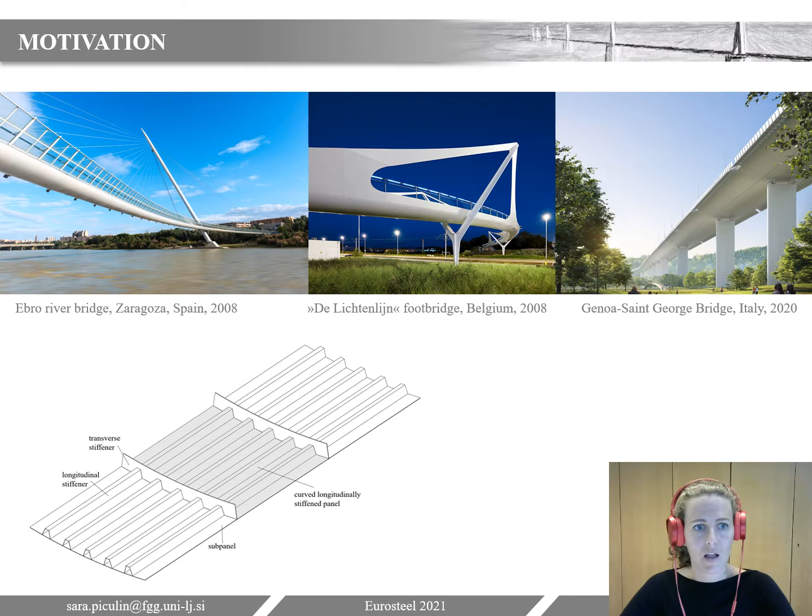It has become widespread in the last 2 decades to employ curved panels in the construction of steel bridges. In this presentation, I will focus specifically on longitudinally stiffened, transversally curved plates representing the bottom flange of a box girder.

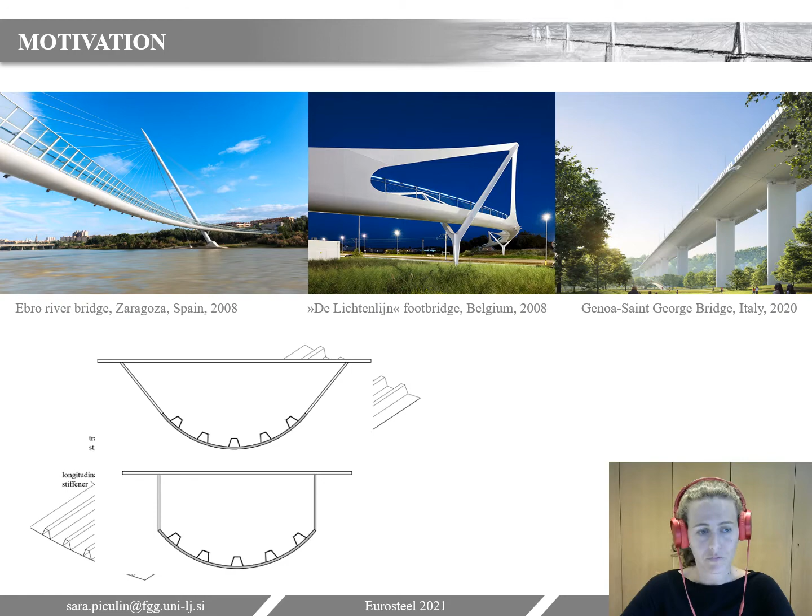In this case, the curved bottom flange is longitudinally welded to vertical or inclined web plates to form a closed box section. One of the most recent bridges incorporating a curved bottom flange is the new Genova bridge in Italy, which replaced the old Morandi bridge that collapsed in August 2018.

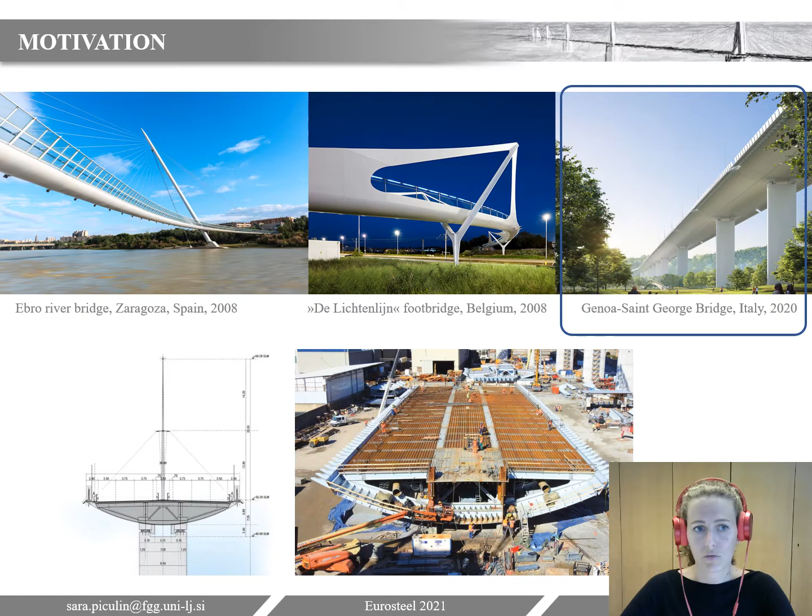The design of curved plates is not the subject of structural Eurocodes. Actually, Eurocode 3-1-5 is limited to flat-plated structures, and Eurocode 3-1-6 refers to shells of revolution.

Several studies showed that the elastic buckling stress and the resistance of curved plates are both strongly affected by curvature. Some authors already proposed approximate methods to evaluate the ultimate resistance of unstiffened curved panels.

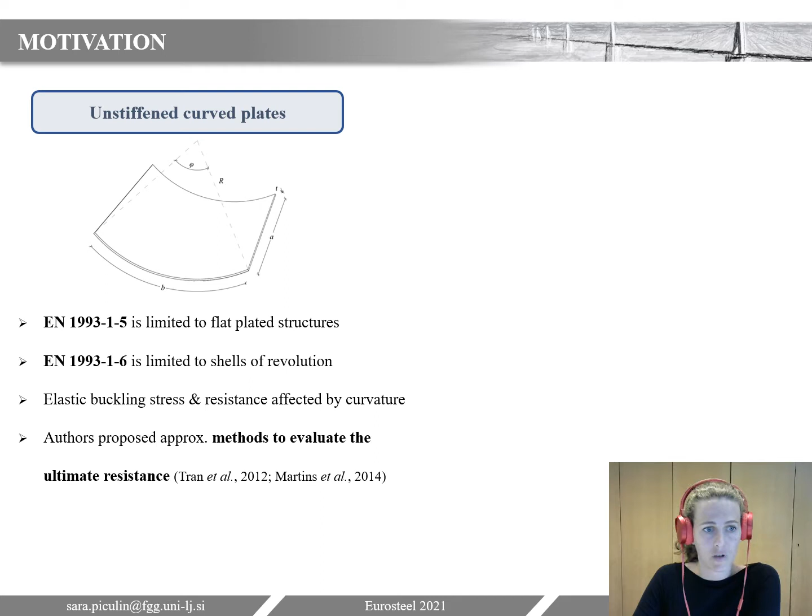When it comes to stiffened curved plates, there is again a lack of practical design rules, and the research is very limited. Most of the available research actually comes from the marine construction field, where the geometry, materials, and imperfections are not directly applicable to bridge design cases.

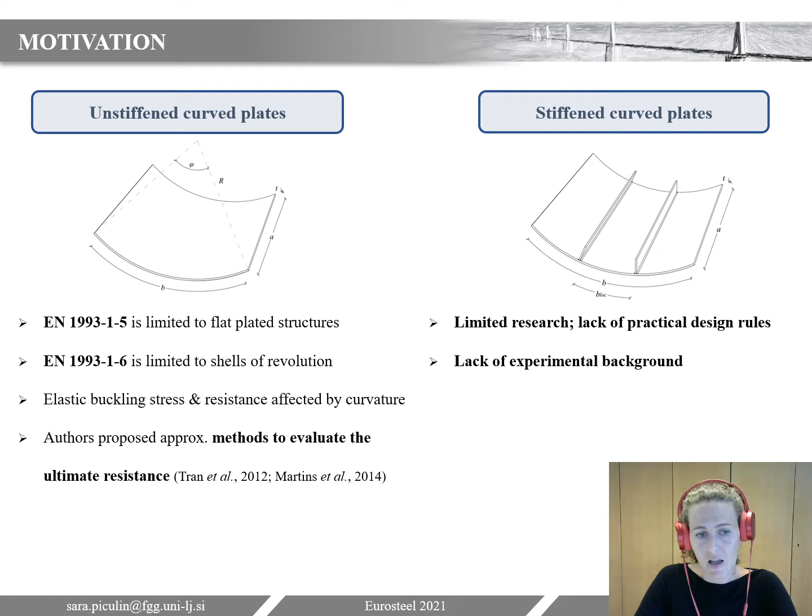On top of all, none of the mentioned numerical analyses has any experimental background. This is why we decided to perform experimental and numerical evaluation of stiffened curved plates and to propose new design rules. Most of the work was done in the framework of the RFCS research project Outburst.

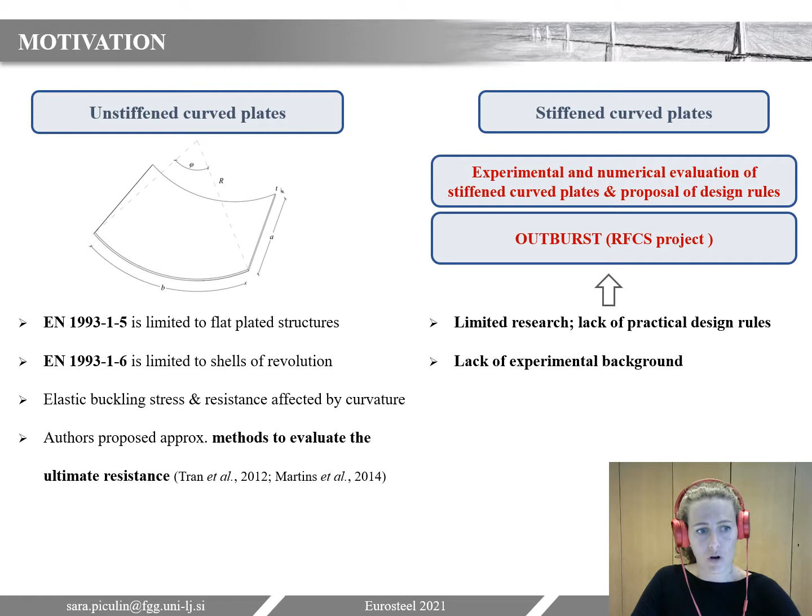Experimental tests on 9 isolated stiffened steel plates subjected to uniaxial compression were performed in the Laboratory of Structural and Traffic Engineering at University of Ljubljana.

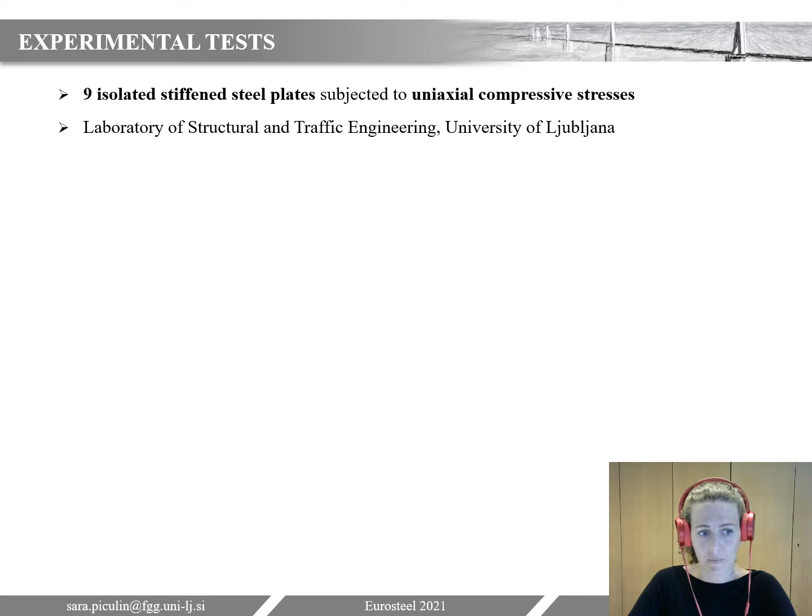The height of the specimens was approximately 1.8 meters and the width was 0.6 meters. The experimental setup was designed to achieve uniform compression in the panel and to avoid any eccentricity in the load application.

The hydraulic piston was installed in the main test frame along with the vertically positioned test specimen, and the load was distributed uniformly on both the panel and the longitudinal stiffeners.

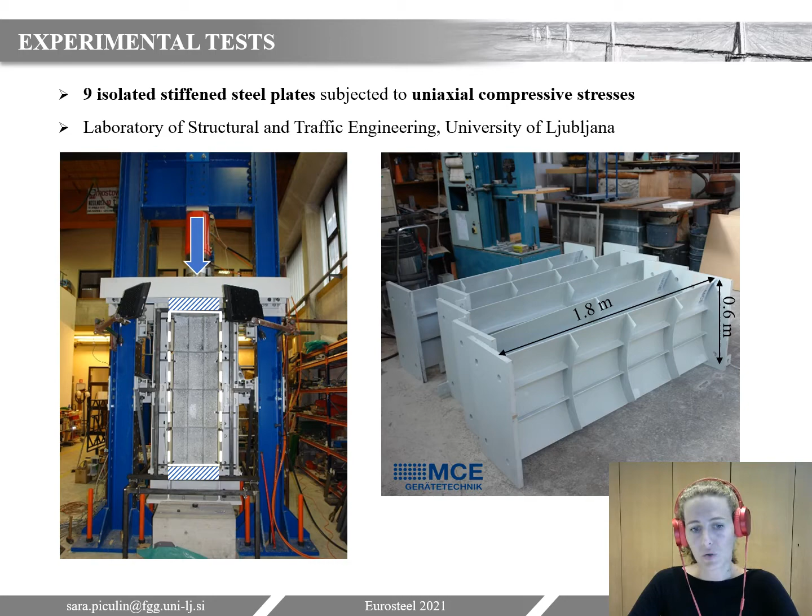The curved edges of the specimen were fixed and the longitudinal vertical edges were simply supported. The tests were displacement controlled up to collapse.

Specimens with different parameters were included in the tests to study their effects on the ultimate resistance. 7 curved and 2 flat panels were tested.

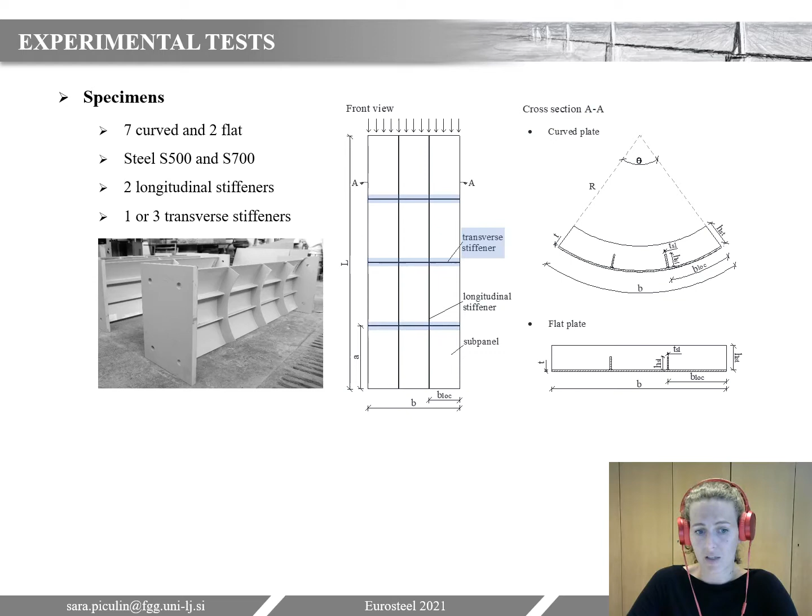They were made of different high-strength steel grades, and all of them were stiffened with 2 longitudinal stiffeners, but some of them with 1 and some with 3 transverse stiffeners, and this resulted in 2 different aspect ratios of panels.

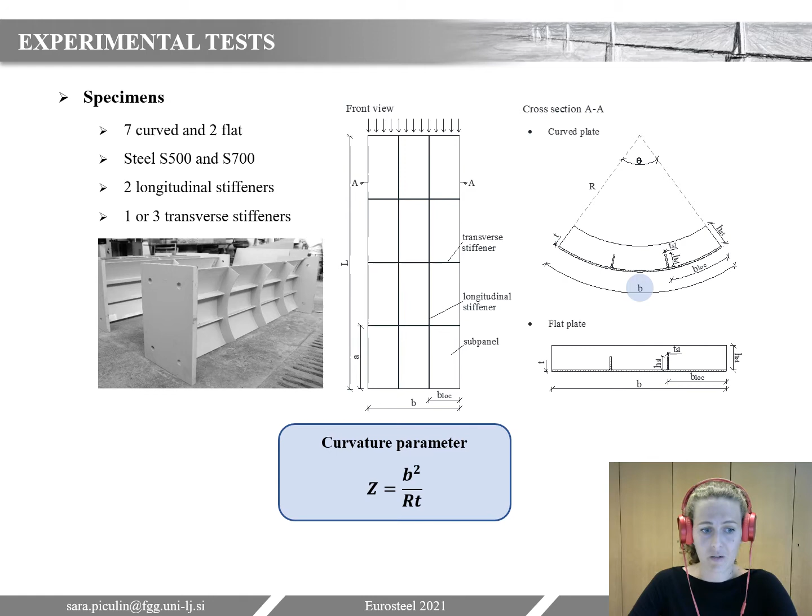The curvature of the panels is described with the curvature parameter Z, that is calculated as the square of the width of the panel divided by the radius of curvature and thickness of the panel.

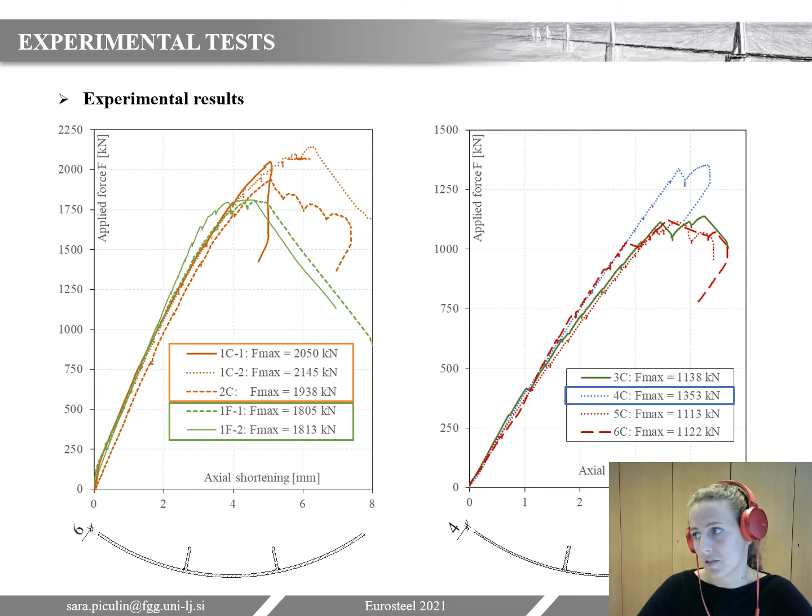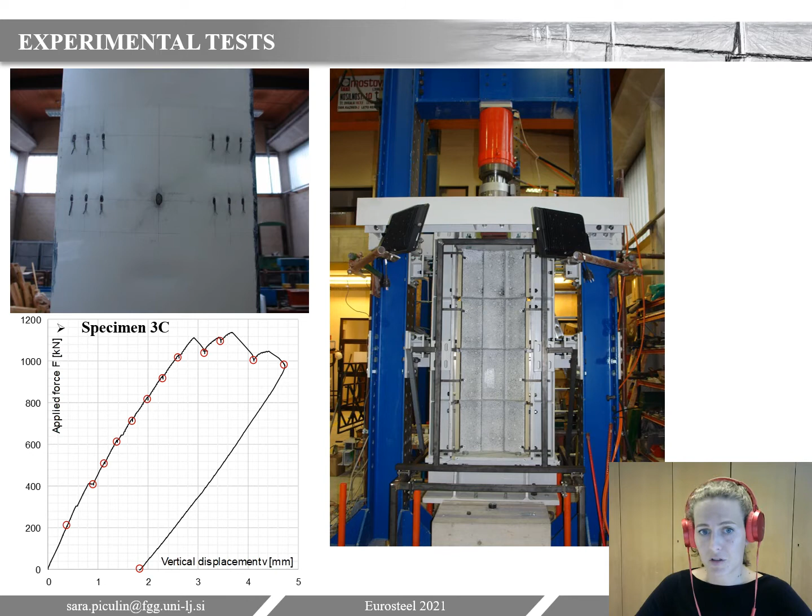In this animation, you can observe the development of the out-of-plane displacements at different loading stages. The figure on top represents the deformed panel after unloading. Here you can see the first buckle, then the second and the third one.

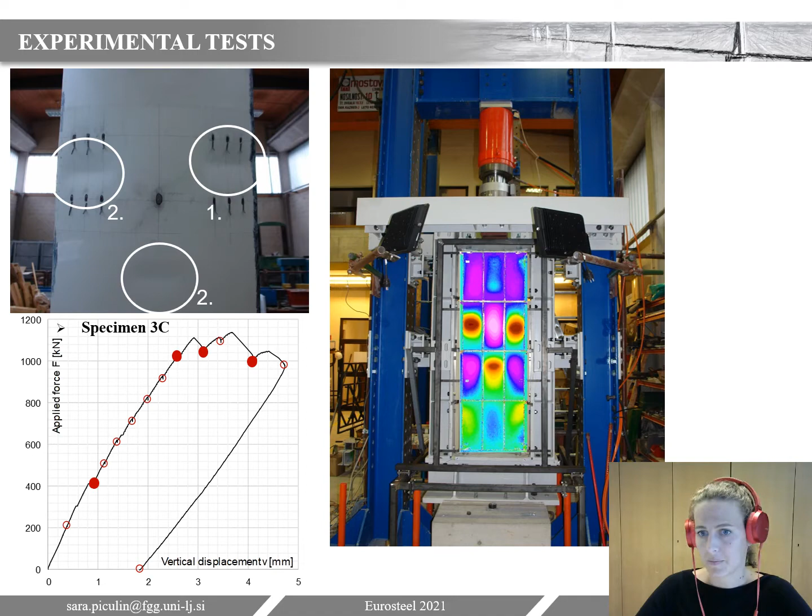In order to assess the general behavior of stiffened curved plates under pure compression, a simple numerical model was created where the geometry was restricted to longitudinally stiffened panels between transverse stiffeners.

A panel stiffened with 5 regularly spaced trapezoidal longitudinal stiffeners is considered. The external load is introduced by a uniform compressive shell edge load in the longitudinal direction, and it acts both on the main plate and the stiffeners.

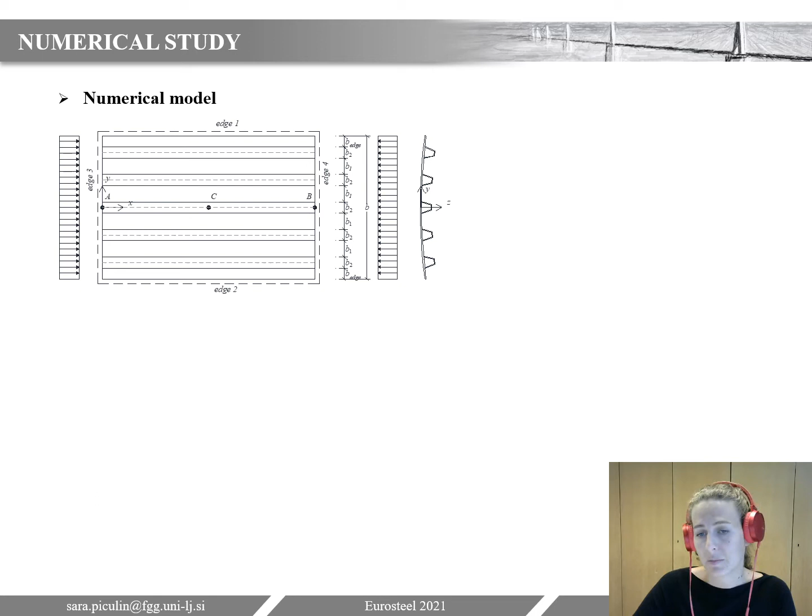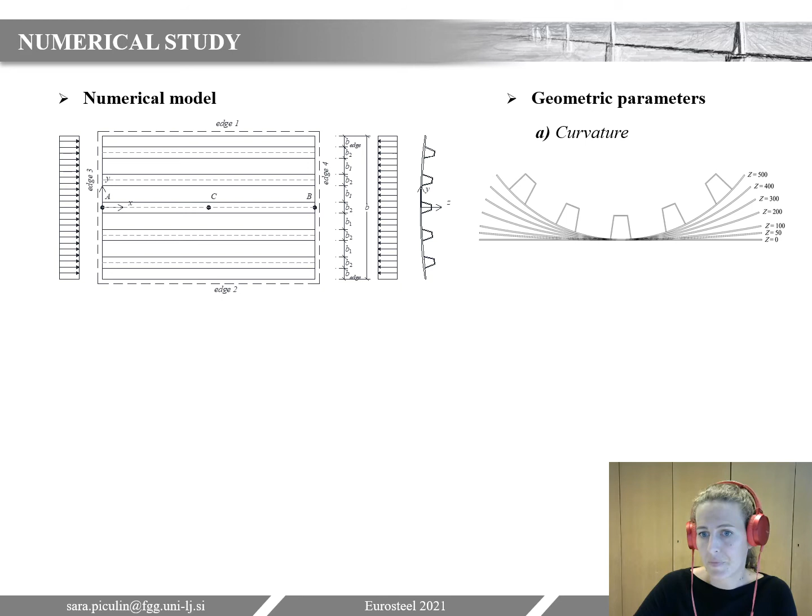The study includes a variety of geometric parameters, such as different curvatures, going from 0 to 500, 3 different sizes of stiffeners, 4 different panel thicknesses, and 7 different aspect ratios of the panel.

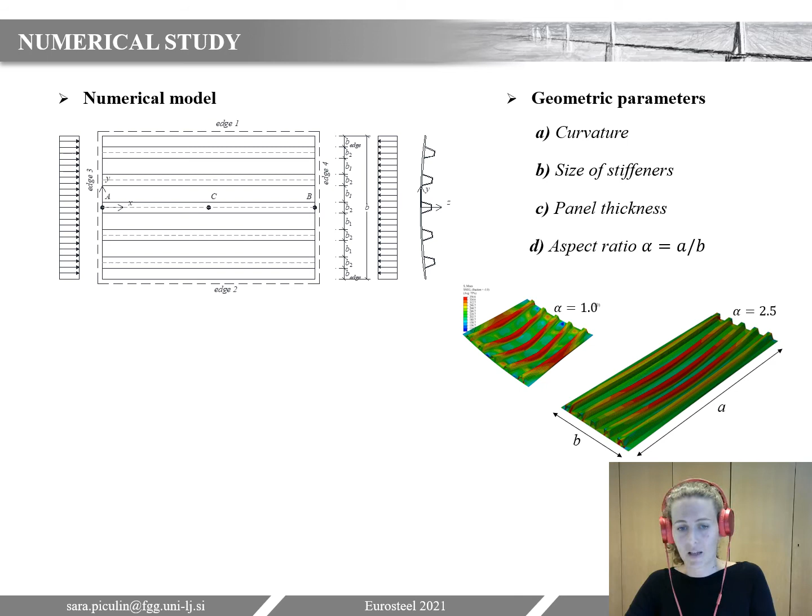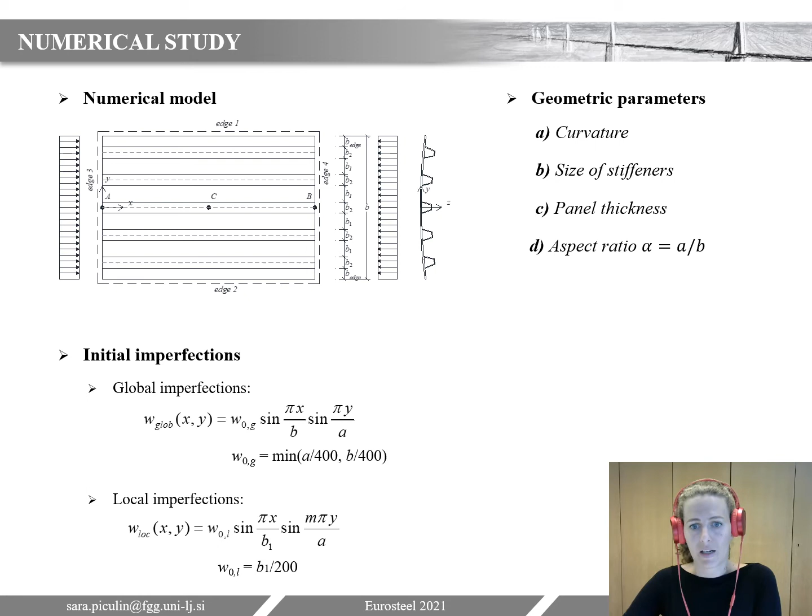The initial imperfections were applied as equivalent geometric imperfections with the shape of sinusoidal functions. Global and local imperfections are applied in the model, and 7 different combinations of initial imperfections are considered for each set of parameters, as shown in this figure. For each set of parameters, we performed 7 analyses, and the characteristic resistance of the plate is finally defined as the most unfavorable of the 7 resistances.

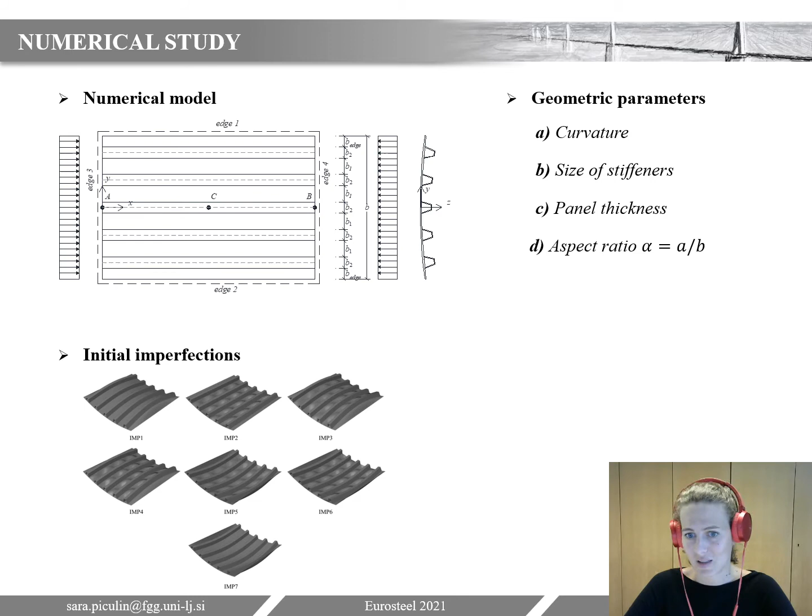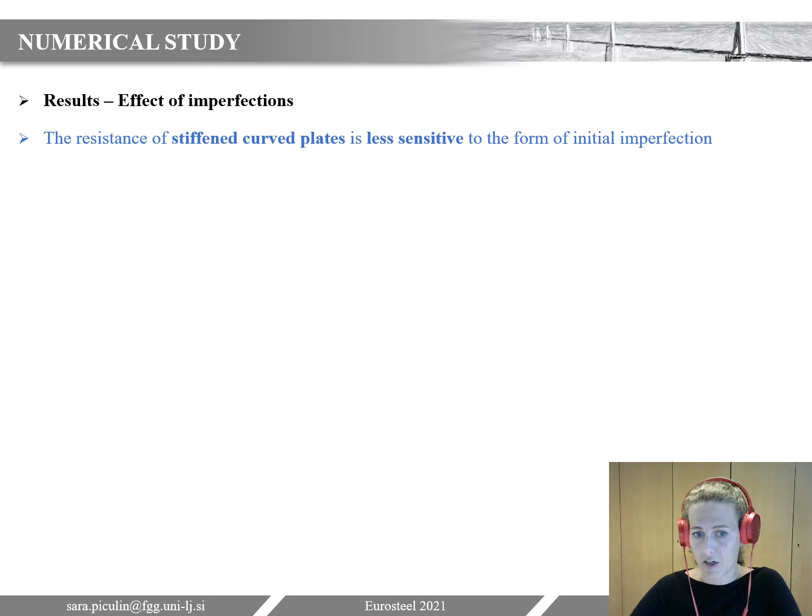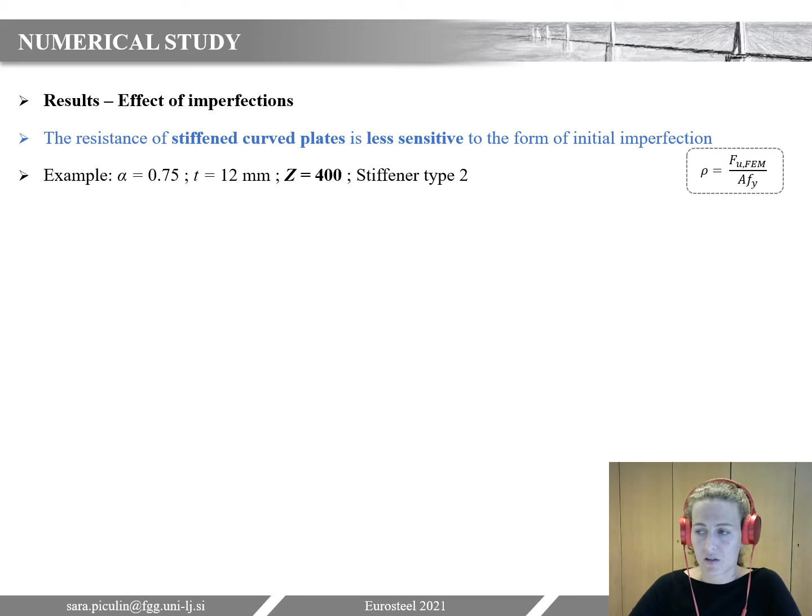The results of the numerical study show that the resistance of stiffened curved plates is less sensitive to the form of initial imperfections compared to flat panels. An example is given for a plate with curvature Z 400, where the difference between the resistance for the most favorable and the least favorable imperfection shape is only 2.5%.

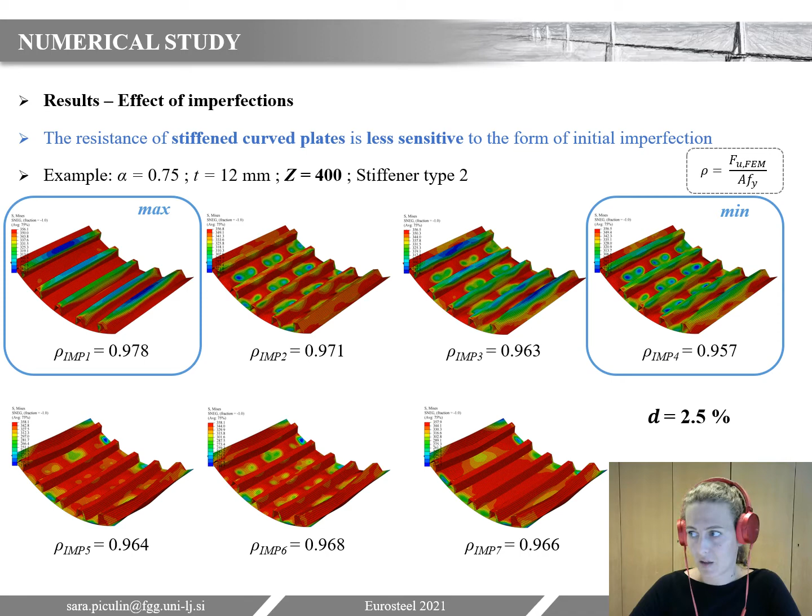While for a flat plate with the same dimensions, the difference is 19%.

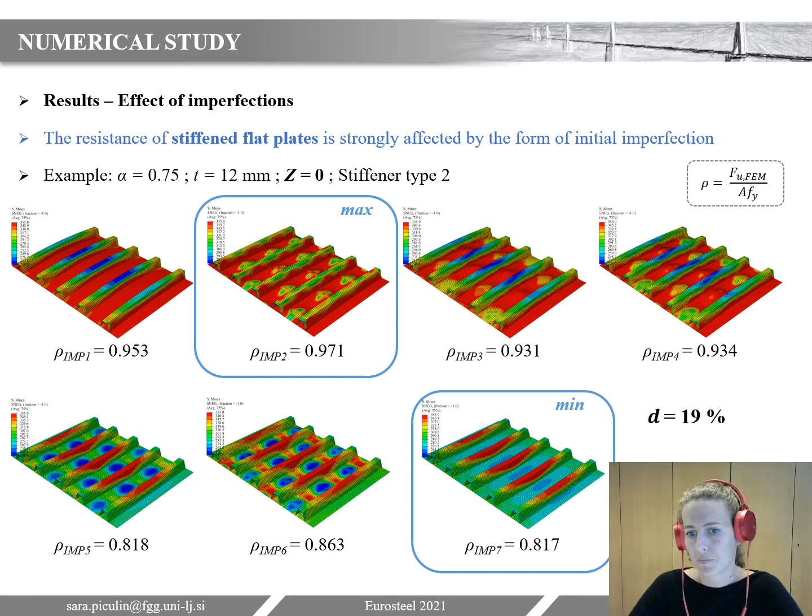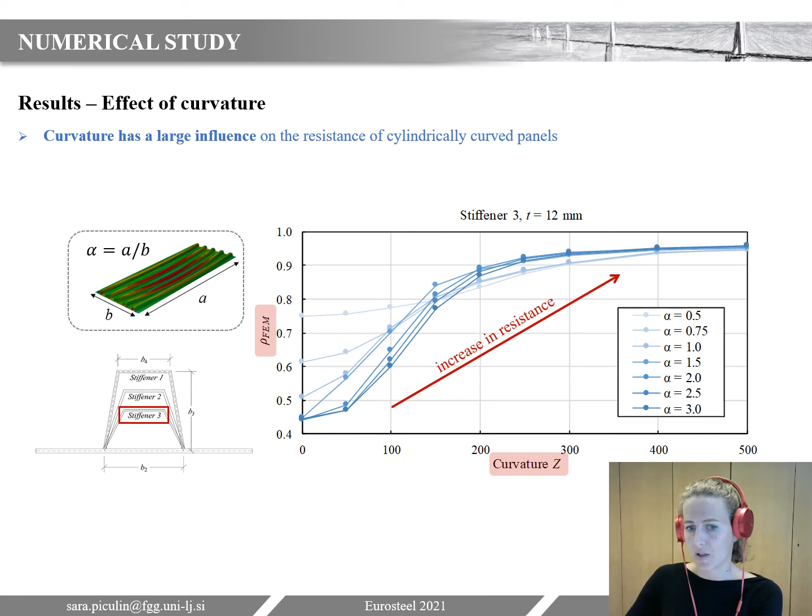The results show that curvature has a large influence on the resistance of curved panels. Actually, the resistance is in general always increasing as the curvature increases. This diagram gives an example for long, highly curved panels with flexible stiffeners, where the resistance is twice as high as for flat plates with the same dimensions.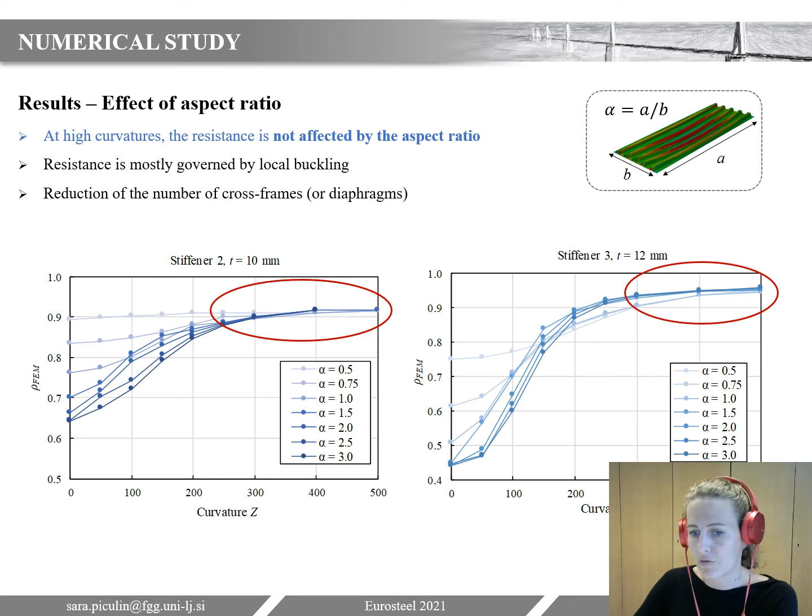Reducing cross frames means a reduction of material consumption and welding, and in a bridge structure this leads us to 2 very important benefits. These are the reduction of fabrication costs and environmental impact.

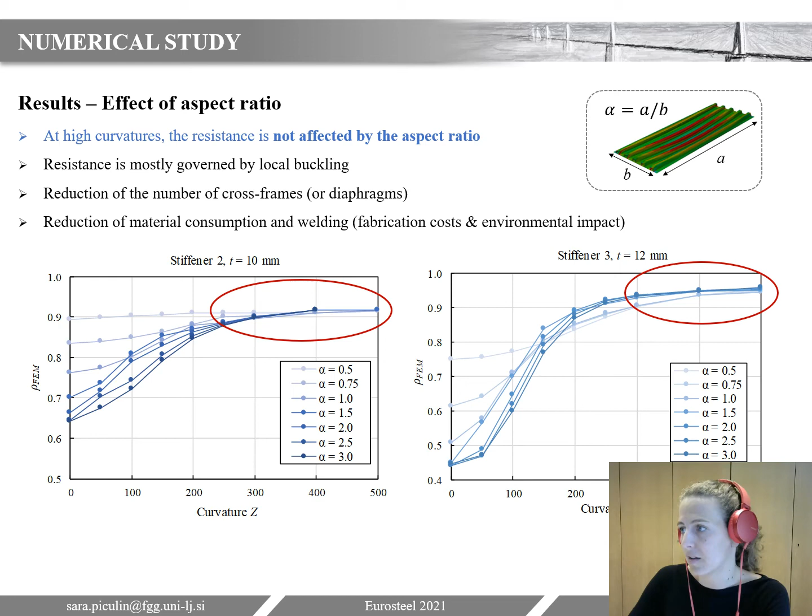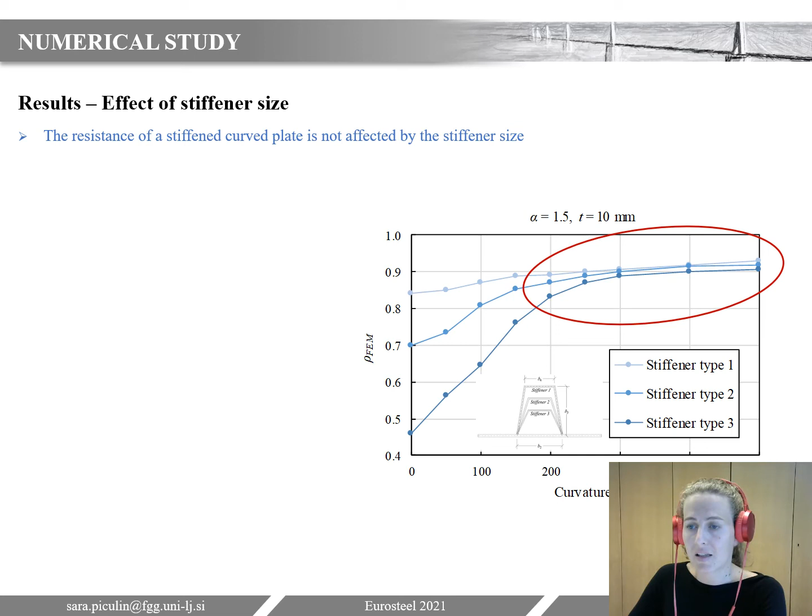Here we are comparing stiffeners for different sizes. As you can see, the resistance of a stiffened curved plate is not affected by the stiffener size at high curvatures. This is because at high curvatures, the size of the longitudinal stiffener does not add much to the cross-sectional moment of inertia, since the plate itself has a much higher inertia compared to the flat plate.

Smaller stiffeners affect the overall structural weight and material consumption, but more importantly, they simplify the assembly of transverse stiffeners or cross girders with the panel.

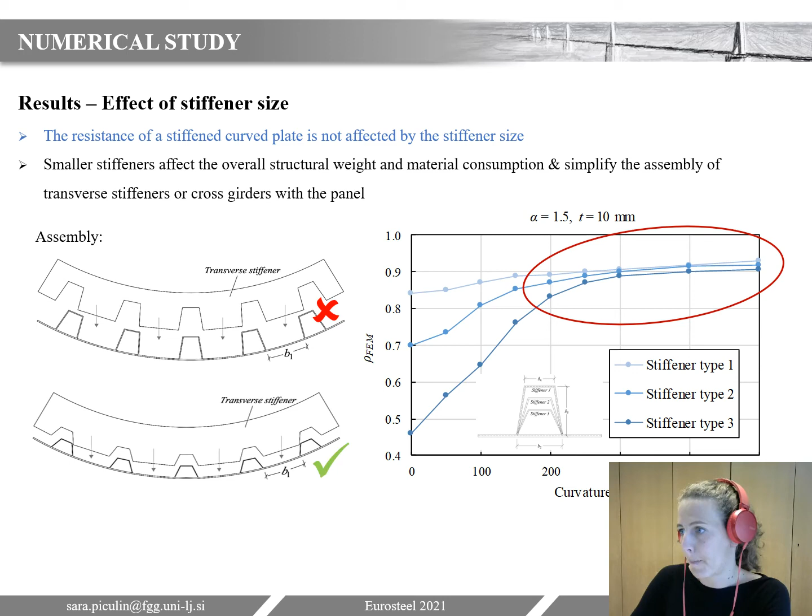Comparison of the numerical results with the design guidelines for flat-plated structures from Eurocode 3-1-5 show that the use of Eurocode neglects the positive effects of curvature and leads to extremely conservative results.

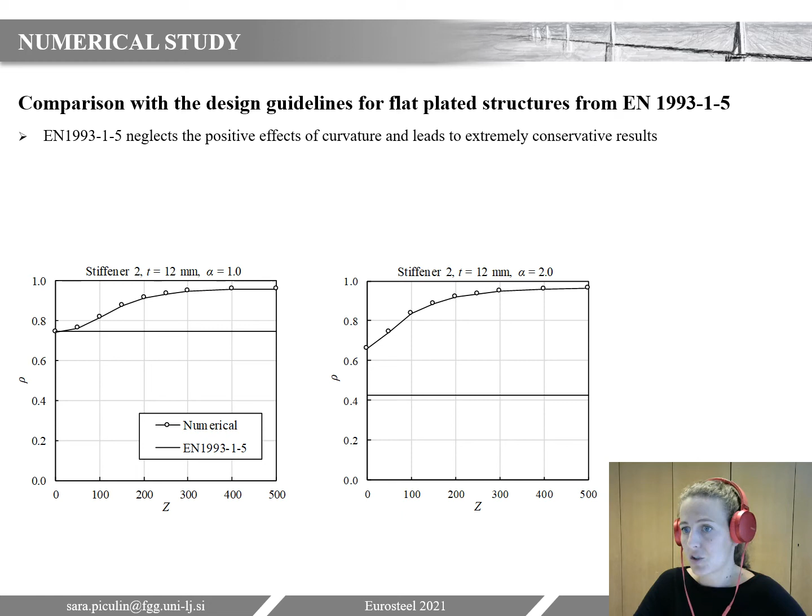This is why we developed new design rules for stiffened curved panels. The presented method is intended for practical use and is in accordance with the design rules for flat plates, but it takes into account the positive effects of curvature.

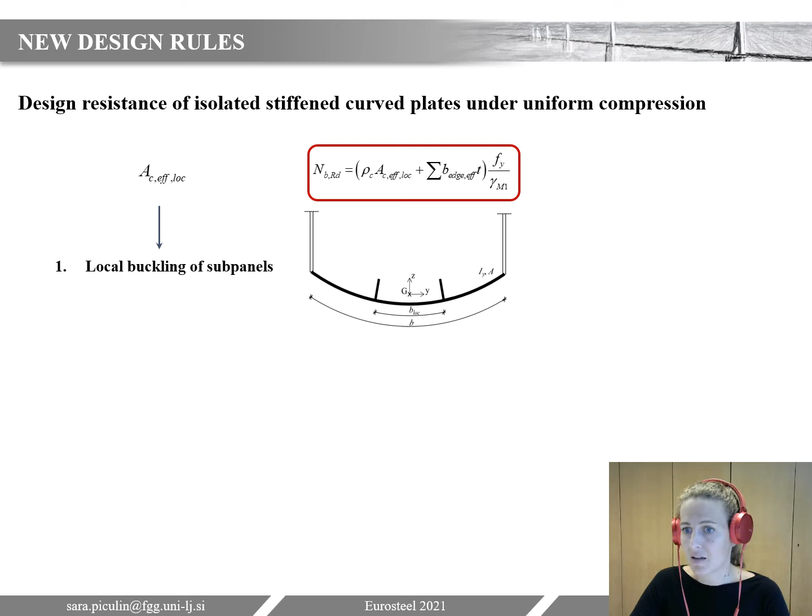So, similar to flat plates, the resistance is determined by the interaction of local buckling of subpanels and global buckling of the entire stiffened plate. First, we calculate the local and global curvature parameters, and then the effective areas are calculated for stiffeners according to Eurocode 3-1-5, because they are composed of flat panels.

And for the main panel, if local curvature of subpanels equals 1 or less, we follow Eurocode 3-1-5. Otherwise, the rules proposed by Martins should be used. The two articles with the rules are referenced at the end of the presentation.

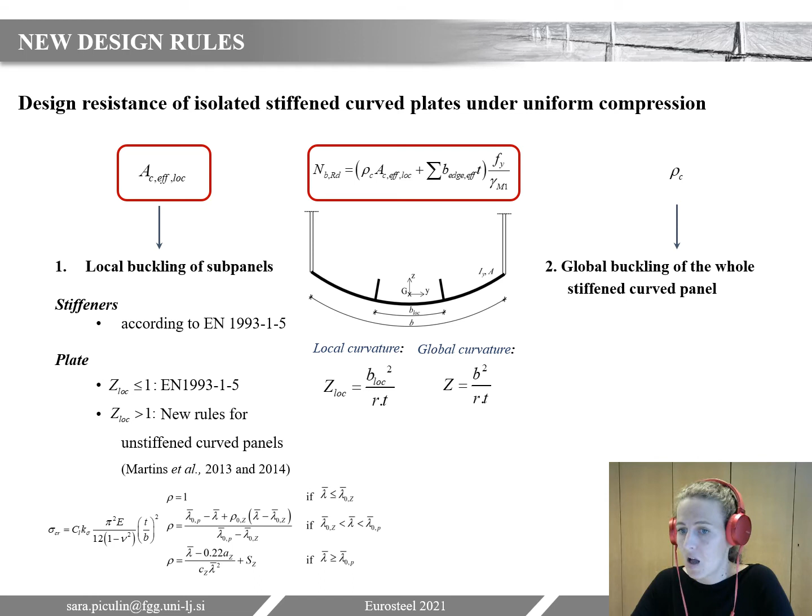For the global buckling reduction coefficient, we calculate the shell-like buckling and then the column-like buckling coefficient, and finally interpolate them according to Eurocode 3-1-5. The shell-like and the column-like buckling coefficients were derived by the authors.

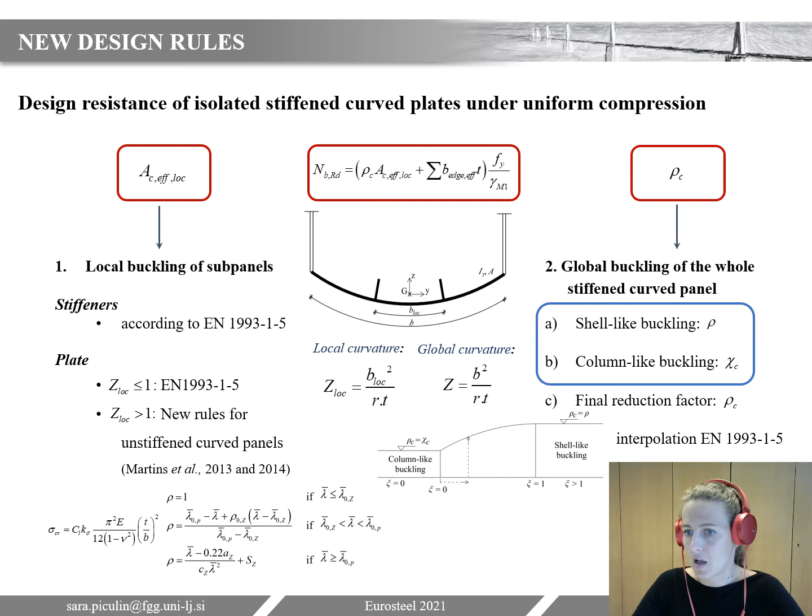For shell-type buckling behavior, the elastic critical buckling stress and the buckling coefficient were derived in the recent article by the authors that is referenced at the end of the presentation. Both equations depend on the moment of inertia of the cross-sectional area of the longitudinal stiffener and the adjacent parts of the curved plate. When having the critical stress, the reduction factor for shell-type buckling, rho, is again obtained from the rules proposed by Martins.

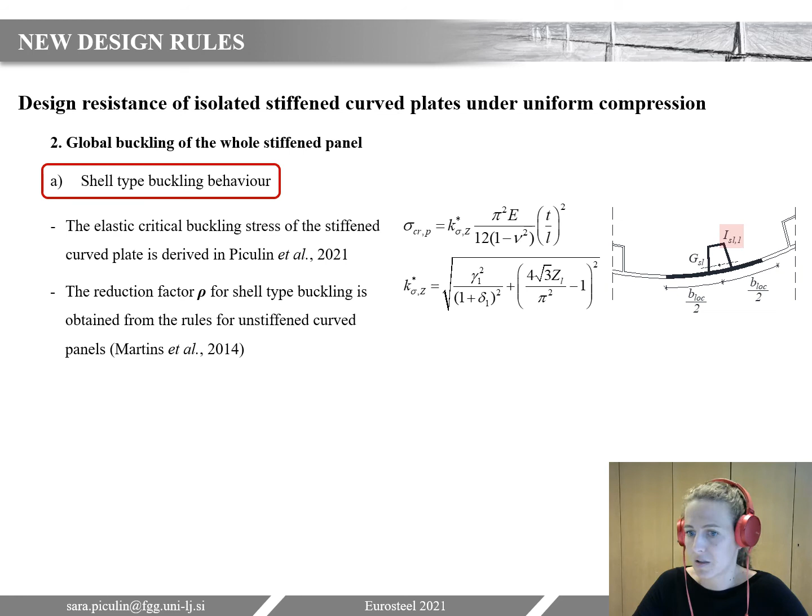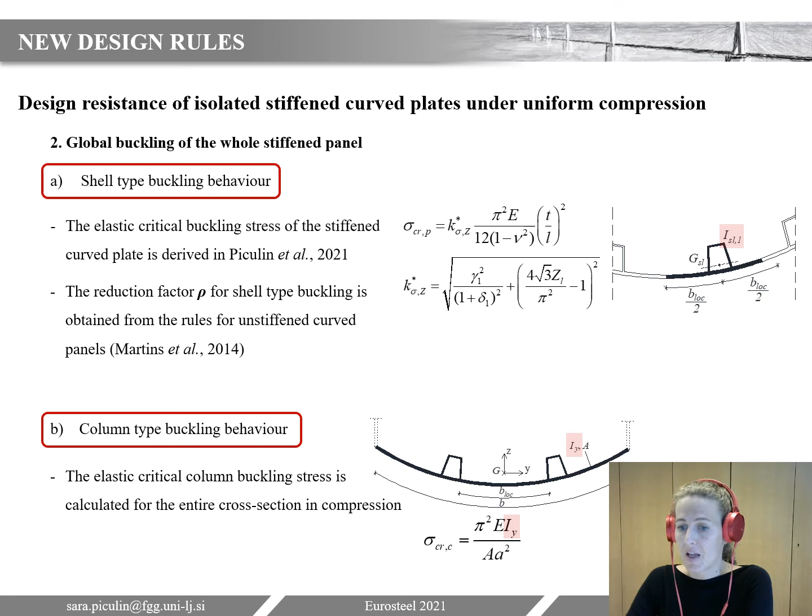At last, for column-type buckling, the elastic critical stress is calculated for the entire curved cross-section in compression, and the reduction factor is determined according to Eurocode 3-1-1.

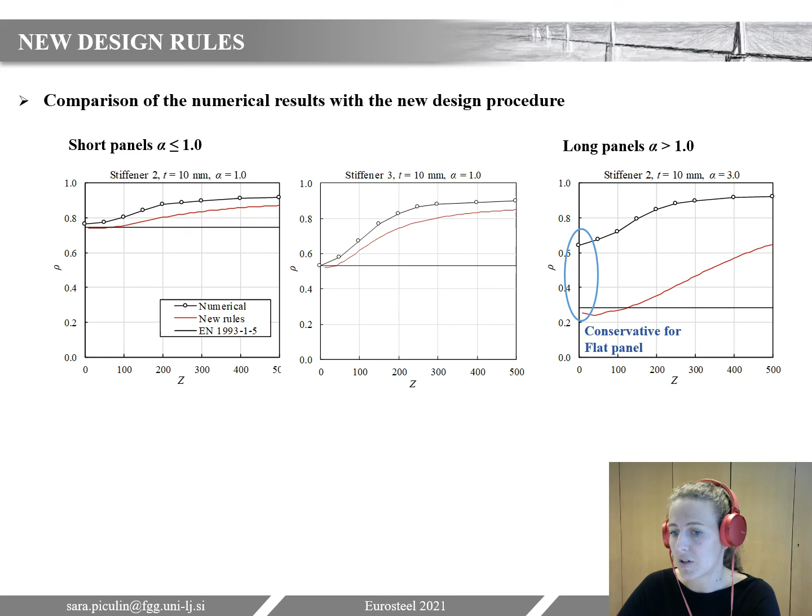This is mainly due to the fact that the procedure neglects the positive influence of torsional stiffness of stiffeners with a closed cross-section. But this is the same conclusion that we can make also when comparing flat panels with the existing rules from Eurocode 3-1-5, because they strongly underestimate the numerical results for aspect ratios larger than 1.